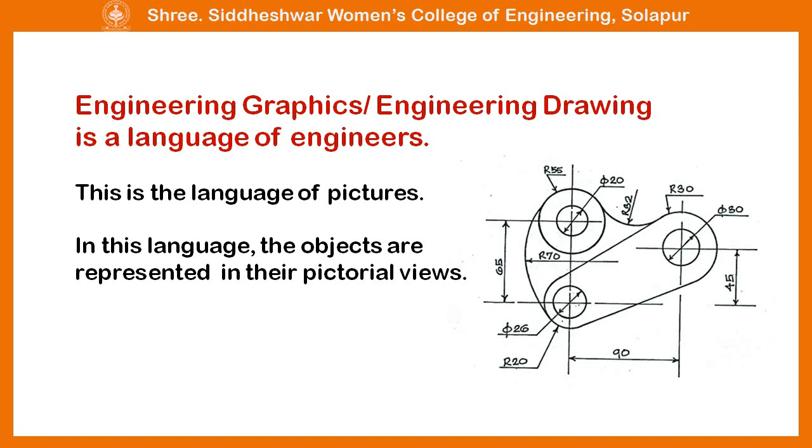Engineering graphics or engineering drawing is the language of engineers. This is the language of pictures. In this language, the objects are represented in their pictorial views. Then who is going to use this language of pictures? Who is going to communicate with whom? Usually, it is a communication between the design engineer and the manufacturing engineer. Who is the design engineer? What is his role? Let us see.

Design engineers do the research and make the design of companies' new products. They have creative minds and decide the size, shape, material, color and various parts of the new product in their mind. The design in their mind they need to communicate with the manufacturing engineer. Who is the manufacturing engineer and what is his role?

Manufacturing engineers are experts in manufacturing processes. They use different machine tools to transform the idea of the new product conveyed by the design engineer into an actual product. Here, the design engineer wants to communicate with manufacturing engineers. Then what is the problem with usual language?

Our usual language communicates messages as oral communication and written communication. In oral communication, one person speaks and the other listens carefully and understands the message thoroughly. Here the message is conveyed orally. In written communication, one person writes the message and the other reads it carefully and understands it well. Here the message is conveyed in written form.

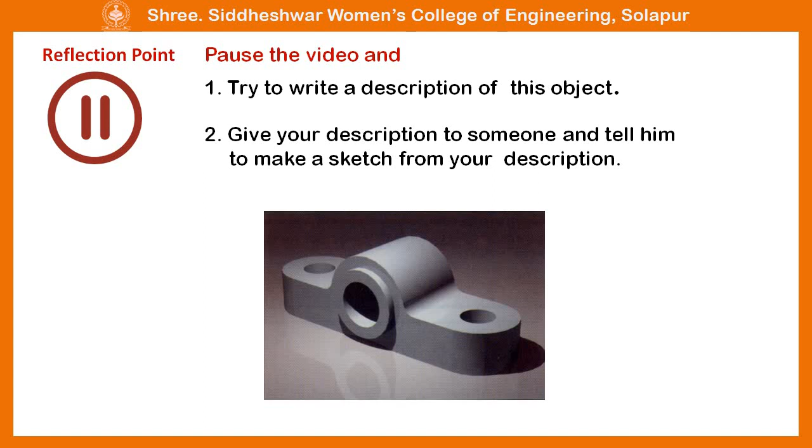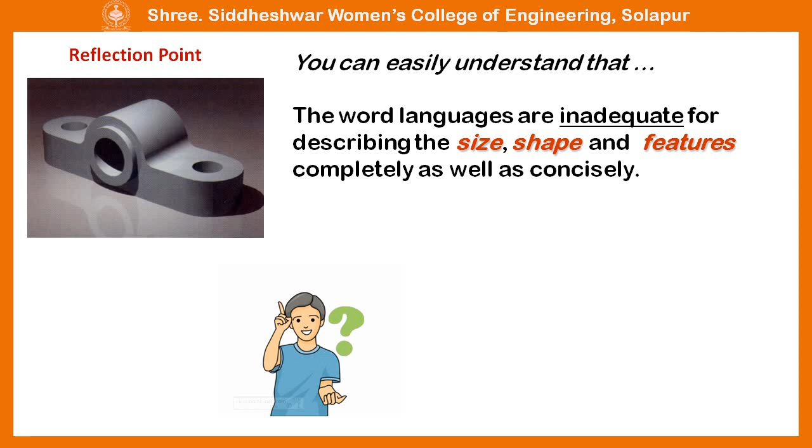After seeing the sketch by your friend, you might have understood that the picture that was in your mind is not fully conveyed to the person who is sketching. He has sketched it in a different way. Something is missing. So you can easily understand that word languages are inadequate, insufficient for describing the size, shape and features of the object completely as well as concisely. And here comes the role of graphics. Here the language of pictures and graphics begins.

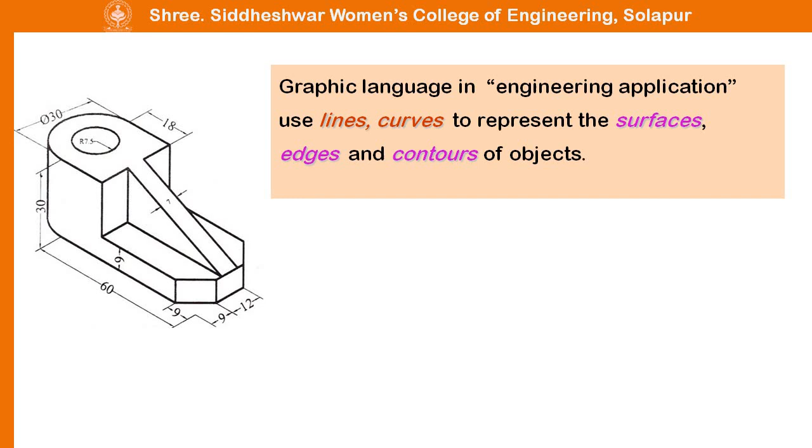Graphic language in engineering applications uses lines and curves to represent the surfaces, edges and contours of the objects. The language is known as drawing or drafting. And this subject we know as engineering drawing or engineering graphics. A drawing can be done using freehand, instruments or computer methods. Let us see one by one.

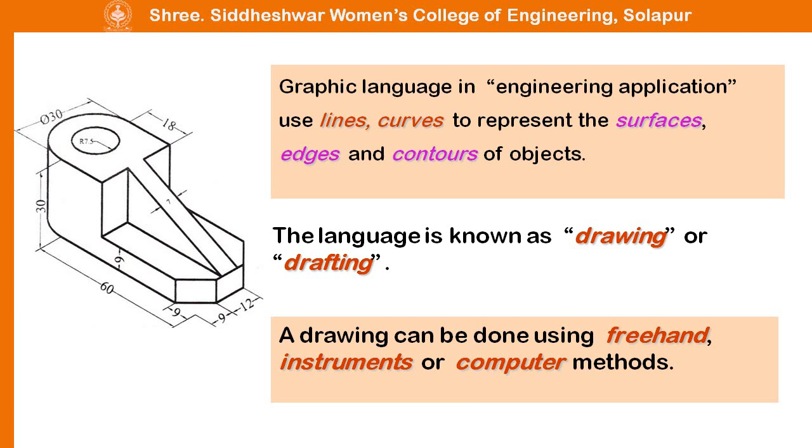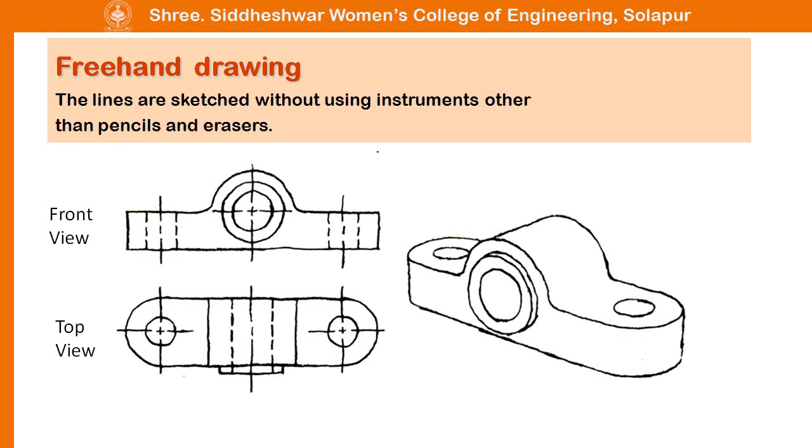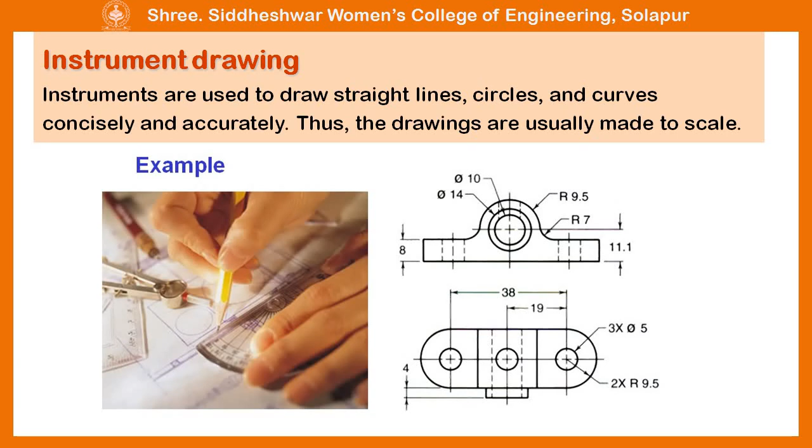The same thing is drawn using instruments like scale, compass, protractor, set square, etc. These drawings are called instrument drawings and are usually drawn to scale, and the dimensions are written on these drawings. Nowadays these freehand sketches and instrument drawings are replaced by computer drawings, usually made with commercial software such as AutoCAD, SolidWorks, CATIA, etc.

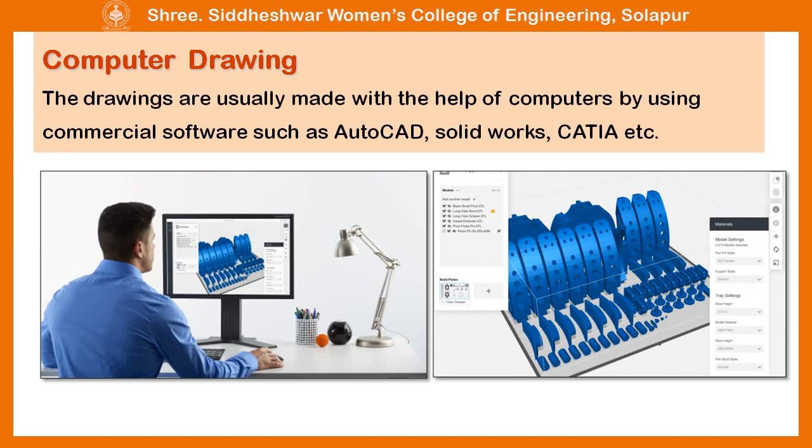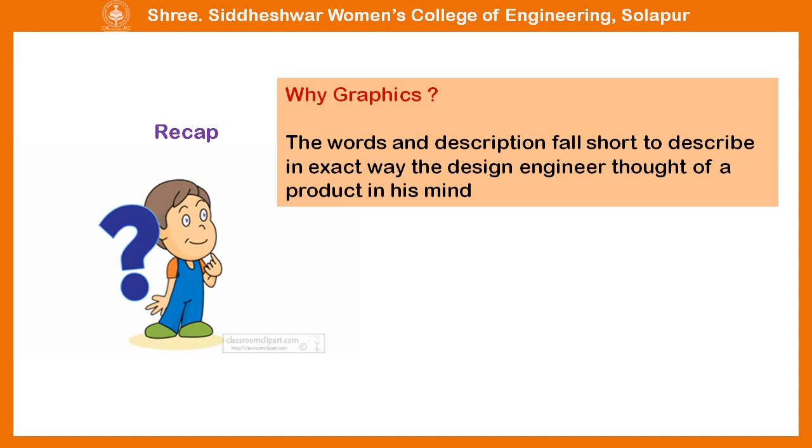Now let us see a recap of today's video. What have we learnt? First, why graphics? Words and descriptions fall short of describing exactly what the design engineer thought of a product in his mind. So here the language of pictures begins. And the second point we have learned is that a drawing can be done using freehand, instruments or computer methods.